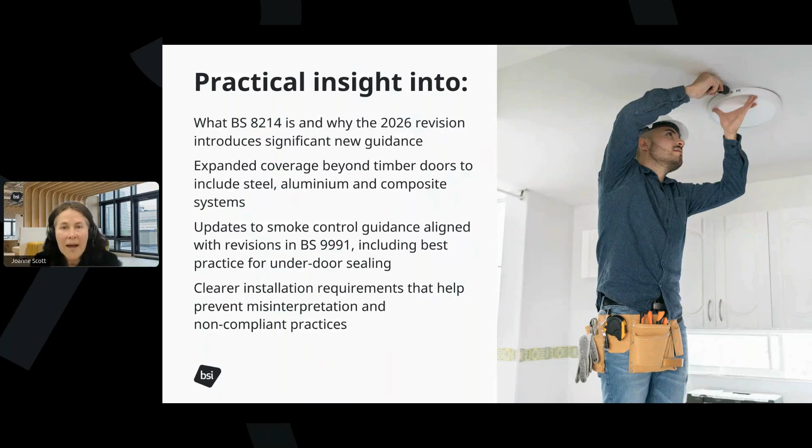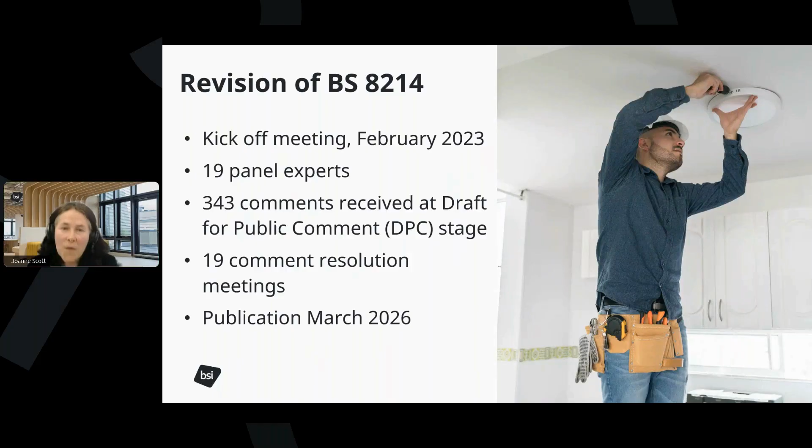So we had a kickoff meeting back in February of 2023. There were 19 experts on the panel and a mammoth 343 comments received at draft for public comment. That's the DPC stage. There were 19 comments resolution meetings. Finally, publication in March of 2026. Next slide, please.

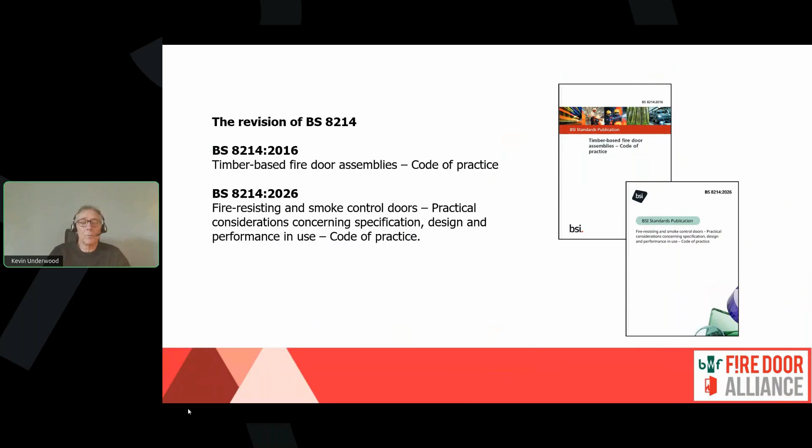We've touched on some of the themes of the changes that we've covered in this revision, and primarily, as you can tell in the titles that are on screen now, we've moved away from timber-based fire door assemblies into more widely encompassing fire-resisting and smoke control doors, and practical considerations around the specification, design, performance in use code of practice. It has principally incorporated more materials and more detail on what affects fire doors.

First of all, I'd like to thank the team that enabled us to run this project. First of all, the committee manager, Joanne Scott, who you've already met, but also two important people, our editorial project managers, Kemi Ho and Beverly Goodchild, without whose help and encouragement, I don't think we would have managed to get through this project. I'd also like to thank the team at BSI, because I know that there are a lot of people behind the scenes who were acting to help support this change, and certainly at the end when we were doing the final editing to get the standard ready for publication. And of course, I'd like to thank all the members of the drafting panel, which was B538111. Next slide, please.

So the committee structure within BSI: at the head of the structure is the technical committee B538, which I chair, and that covers all aspects of doors, windows, shutters, hardware, and curtain walling. Below that, there is the subcommittee B5381, which specifically covers windows and doors.

And then as a panel associated with B5381, we had B538111, which was the specific drafting panel for this revision of BS 8214. This is a temporary panel, so it will be dissolved once this work is completed.

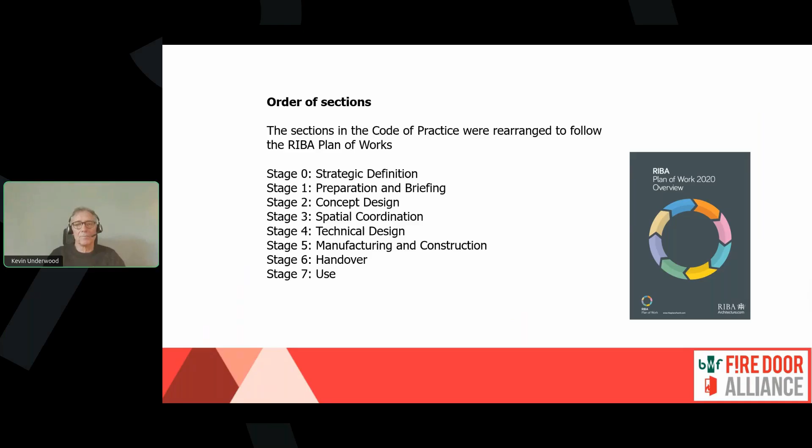So we reviewed the order of the sections, and as a guide, we then followed the RIBA plan of works so that we had all the design work and specification done first, then the product manufacturing, installation, handover, etc. Prior to following this principle, the sections of 8214 were not in the logical order as the project would be run on site. Next slide, please.

Competence. I think this is going to be talked about by other presenters as well, but the code of practice calls upon individuals and organizations who undertake a function in relation to fire doors to be competent, and they should have the necessary skills, knowledge, experience, and behaviors to fulfill the function. Further information on how someone is seen to be competent for their function can be found on the BSI Built Environment Competence Hub, which looks at the work that the Industry Competence Steering Group is doing with their sector-led groups on various aspects of construction. Next slide, please.

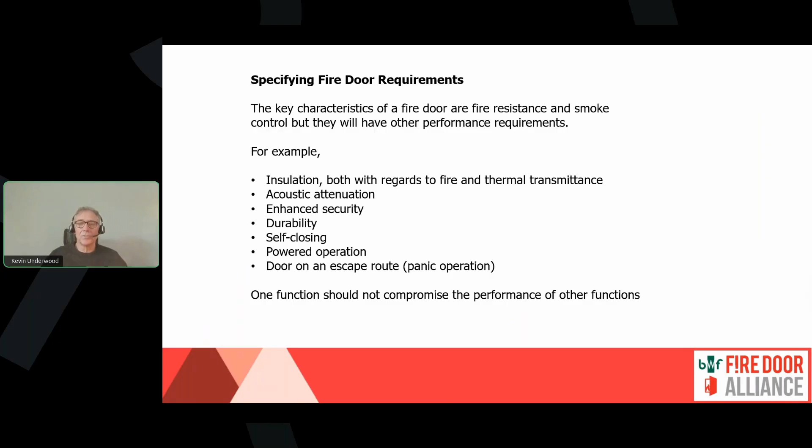Specifying fire door requirements. The key characteristics of fire doors are fire resistance and smoke control, but they will have other performance requirements. For example, I won't go through all of these: enhanced security, durability, self-closing. The key aspect of this change is that one particular function should not compromise the performance of all the other functions. Next slide, please.

Supporting evidence. Again, I think we're going to go into this in more detail, but supporting evidence can include test reports, DIAPs, direct application reports, EXAPs, extended application reports, field application reports, and technical assessments. If technical assessments are undertaken, they should be done in accordance with the PFPF guide, but also note that there is a project underway to draft a new code of practice for technical assessments, BS 8623. Next slide, please.

Smoke control. The recommended class for smoke control is Sa from BS EN 13501 Part 2. That's a European classification. We would also consider classifications using the national standard for smoke control. But the principle is that we want to note the leakage of smoke at the threshold. And we have removed the prescriptive 3mm gap below the door leaf because we didn't believe that gave a true representation of smoke control. Next slide, please.

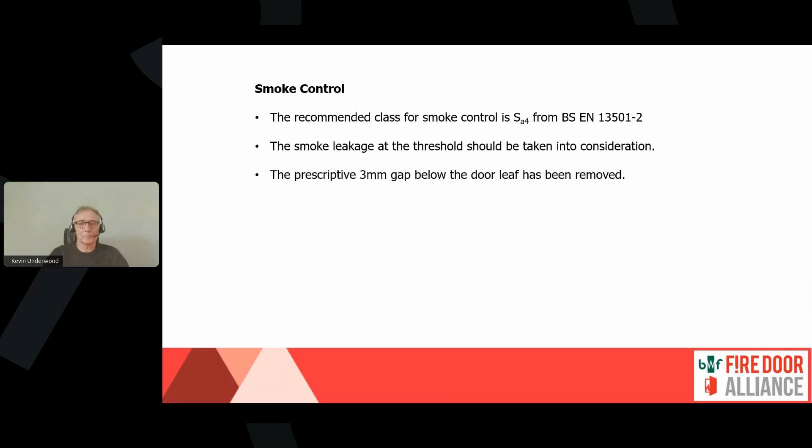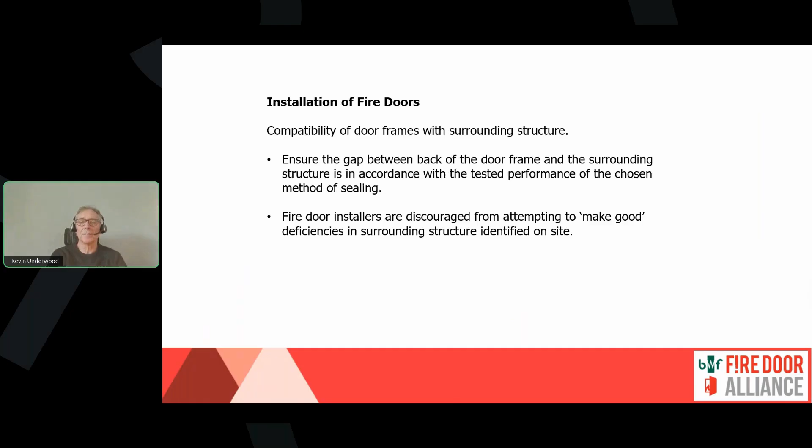Installation of fire doors. First of all, the door frames have to be compatible with the surrounding structure. We need to ensure that the gaps around the door frames to be installed are within the scope of the materials that are being used for the installation. And fire door installers are discouraged from attempting to make good deficiencies in the surrounding structure. Next slide, please.

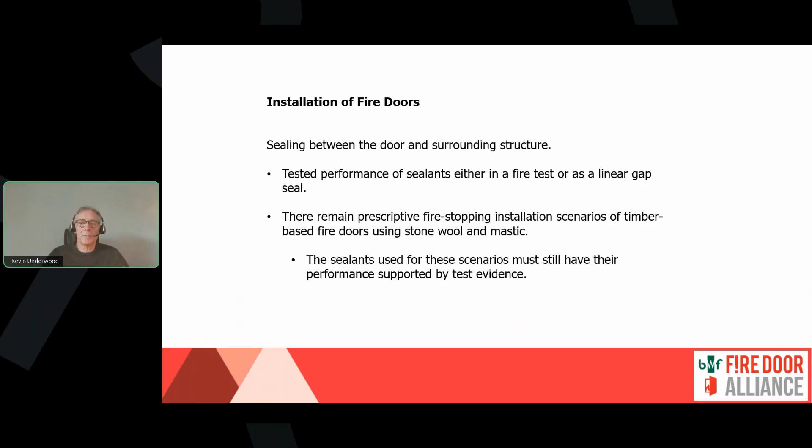Continuing with installation: sealing between the door and the surrounding structure. Tested performance of sealants, either in a fire test or a linear gap seal test. There remain prescriptive fire stopping installation scenarios for timber-based fire doors using stone wool and mastic, but in those scenarios, the sealants used should have had their performance supported by test evidence. And next slide. I think that's it. Yes, thank you.

Okay, so start with classification differences. I'm dealing with them in the order that Annex B brings them up. So in Annex B, section B12, it gives a description of the national system under the BS 476 regime. And if I just run through some of the key points related to that national system, we'll start with the column there with testing.

So the BS 476 series was originally developed back in 1932. It was a single standard back then, covering both resistance and reaction to fire. And then over time, it's gradually been split into specific parts, dealing with things like non-load bearing elements, in which fire resisting doors are tested, BS 476 Part 22. And we also have a specific test method for smoke control of doors as well. And I'll talk a little bit about the determination process shortly, but we have some specific British standards that are used for evaluating the fire resistance performance of doors.

Now, when it comes to the national system, when it comes to extending the scope beyond what has been tested using supporting test evidence, we use a process called assessment. And effectively, that's the application of expert judgment by experts in that field with experience of testing those construction products. And it gives a considered opinion based on suitable and sufficient evidence as to the scope of application, the different designs that could be supported by that test evidence.

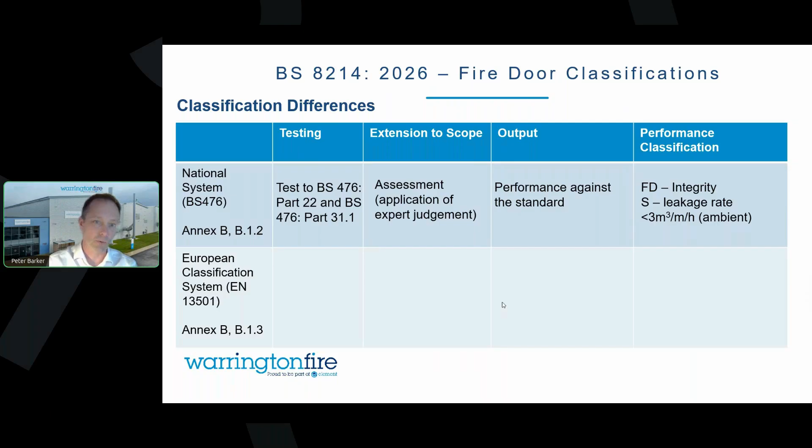Now, under the European classification system, in Annex B, B13, it picks up as a specific section there, and then you can start seeing some of the differences. Now, the European classification system was developed more recently than the 476 series in response to the single market requirements of the CPD at the time, the Construction Products Directive, but now the Construction Products Regulation, with a need to find common technical language, remove technical barriers to trade, and have a recognised single method for evaluating construction products and a way of communicating that performance by way of a classification system.

So that's where we now have the EN test standards, 1634-1 and 1634-3. Part 1 being for fire, Part 3 being for smoke. A different way of extending the scope of application using a more rule-based system to keep with that common technical language, known as direct application and extended application. And then the output, although it's still a performance, it's a classified performance, and these performance characteristics are classified using another series of standards, which is the EN 13501 series.

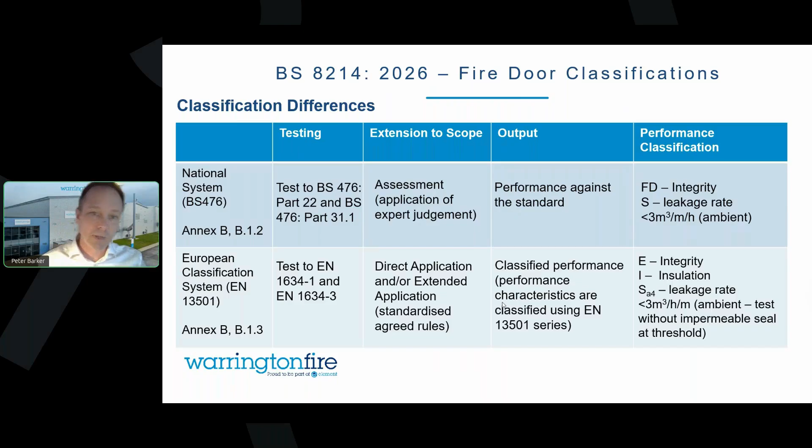And based on that evidence, you can then get performance classifications like I've listed in the box there, where E stands for integrity, I for insulation, Sa is this indication of leakage rate with or without an impermeable seal at the thresholds, some sort of seal, drop seal or fin or blade maintaining contact with the floor. And that classification system is recognised across Europe. That was its purpose, and it is then assigned to the door. And that's the shift towards the classification system using these ways of denoting the performances for those particular products. So they're the differences explained in the sections.

As you work your way through the Annex B, we move on to Annex B2. There's a section specifically on the determination process. So it talks about, first of all, testing and what goes into testing a door. And it talks about things being tested to benchmark standards. I've mentioned both the British standard version and the EN version for testing doors. And effectively, these benchmark standards are conditions that can be repeated to evaluate the performance of the product in standardized test conditions.

That's how we evaluate the door within a supporting construction, exposed to those test conditions, which are given in the test standard, along with the time temperature curve, the instrumentation, the modes of failure, what to record, what goes into a test report. And then on completion of that test, that information is collated into a test report, and that test report is a statement of fact. It tells you what was tested, conditions under which it was tested, the method against which it was tested, and the results from that test.

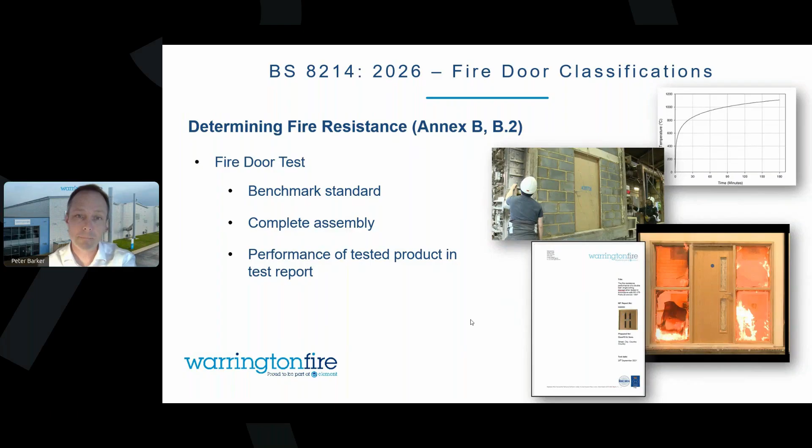We take that report, and based on that evidence, we're looking to widen the scope, either by interpolating the results, so what scope is covered by the results, or extrapolating to see if there's extension to scope that can be offered from that test evidence. Now, in the national approach, we use a guiding document. Kevin mentioned the PFPF guide. There's further work taking place within BSI to develop a code of practice called BS 8623 for the process of assessment outside of European classification. And inside EXAP, we use a series of standards called EXAP standards, which for doors is in the EN 15269 series. And it's that information that can then be used for a European classification.

And just to give you a flavour of what goes into these assessments: whereas the test report's a statement of fact, an assessment or an EXAP gives you that scope, covering some of the things that I put on the report there, the dimensions that are permitted, configurations, hardware options, seals, glazing, lipping, sizing, door frames, installation, decorative finishes.

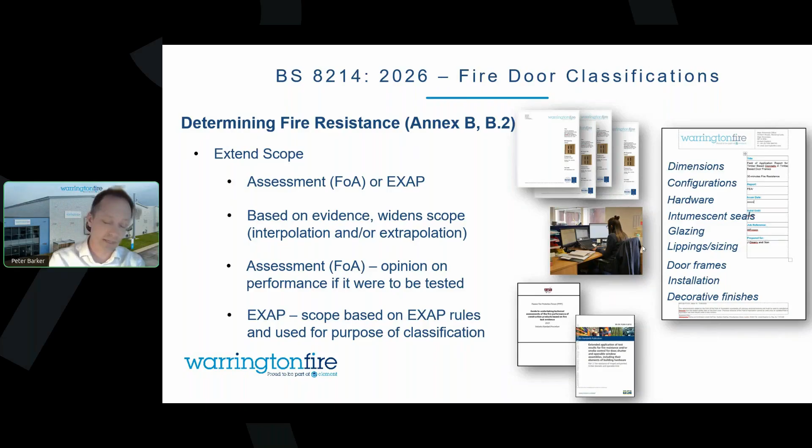And this assessment is often the document that will sit behind and support the third-party certification that we have within the third-party certification schemes that are used within this country, as well as regulated CPR stuff when it comes to CE marking as well, but only EXAPs and classification reports in that case. So that's a determination process.

So a flavour on the testing process, the differences between the European and British BS 476 system. What about understanding the evidence requirements? This was an important part of updating. If you look on the screen there, we've got an example of how supporting evidence is referred to throughout

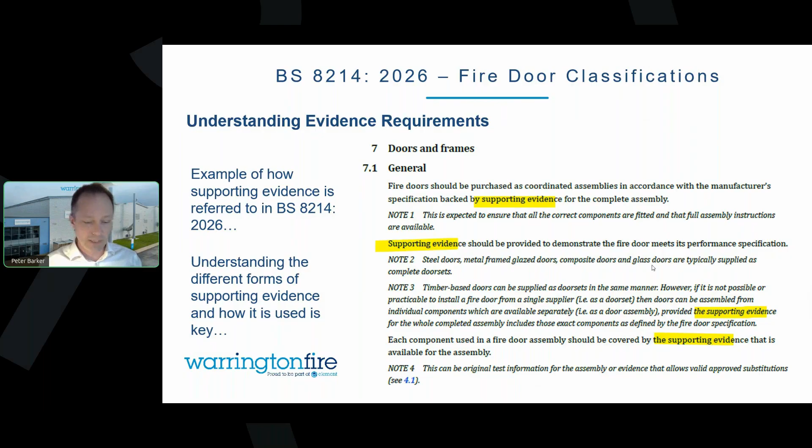BS 8214. For example, fire doors should be purchased as coordinated assemblies in accordance with the manufacturer's specification, backed by supporting evidence. You can see again, supporting evidence should be provided to demonstrate the fire door, and so on. So it's used a lot throughout the whole document, this collective term of supporting evidence. So understanding the different forms that it takes is very important, because although fire testing, as I've explained, is a building block of generating that base evidence, it tells you just on what was tested.

So the test report won't always be the thing that you need to understand whether or not the thing in front of you is supported. But it's an important part. So we have fire test reports. You may also have technical assessments. They could be a specific design assessment, an alteration to a tested product, or they could be a field of application, like I've described, these wider assessments that are used to give a field of application based on a series of test reports. Other pieces of evidence could be a European classification or an EXAP report.

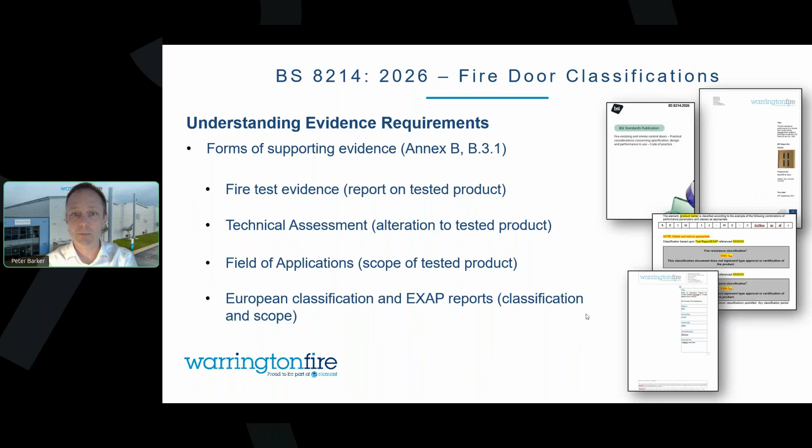There are also other documents that would be considered supporting evidence, such as technical documents and relevant installation instructions for CE mark or UKCA mark product, of which doors, somewhat confusingly at the moment, some fall within regulation, so therefore would be CE marked, and others don't, like internal doorsets. So you could expect to see this. You would also expect to see it on hardware items as well.

There could be other information and data. It mentioned that we have specialized functions. Fire doors do all sorts of other functions as well. So there may be some information there on acoustic or durability to give you some information on those specific functions to be supported by evidence.

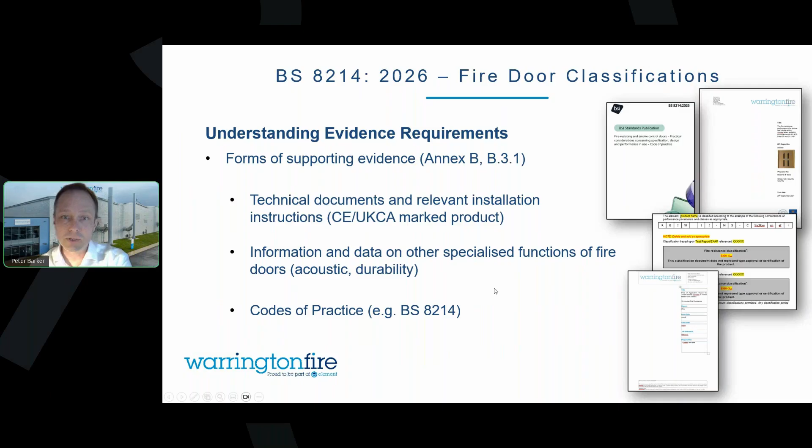But also a code of practice could even be considered a supporting evidence document. For example, the prescriptive ways of installing doors using rock fiber and mastic. The code of practice could then be used to support that particular install, providing it's been considered as appropriate for the door that's being installed. So lots of different forms that it can take.

So, for example, test reports, understanding that they are statements of fact, that any judgment beyond that should be contained within a formal assessment. Understanding that assessments of performance are self-contained, and you have to be very careful and cautious against using assessments on assessments. You would need it to be re-evaluated, otherwise you could be drifting further and further away from the thing that was tested. Third-party certification, understanding that you can only use third-party certification within the rules specified within third-party certification. Just because it's been certified doesn't mean it will work with another certified product unless there's that link.

European classification and EXAP, understanding the differences as to what that means and what can be used in that process. Product technical documents, understanding the CE marking, UKCA marking, declarations of performance, and what can work within that arrangement and that system. If you get any information and data from data sheets from manufacturers, making sure that you can interrogate that with supporting evidence as required.

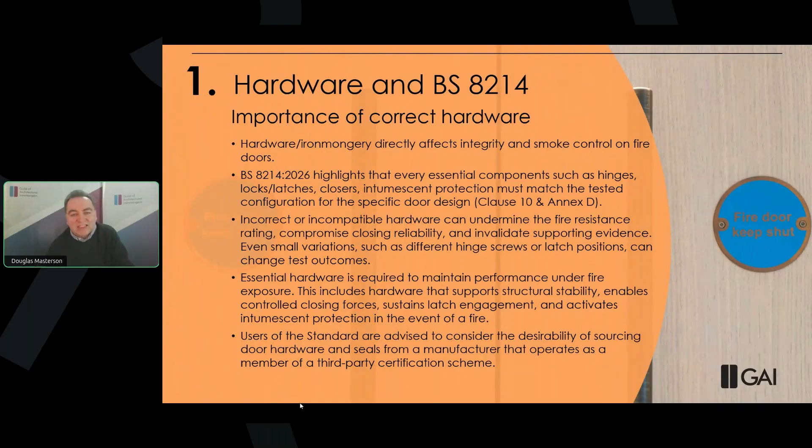So let's look at the importance of the correct door hardware on a fire door first. Now, hardware, otherwise known as architectural ironmongery, directly affects both integrity and smoke control on fire doors. And BS 8214 highlights that every essential component, and all the essential components are listed in Annex D. These include products such as hinges, locks and latches, door closers, intumescent protection, they all must match the tested configuration for the specific door design.

Now that's really important because incorrect or incompatible hardware can undermine the fire resistance rating, it can compromise closing reliability, and it can invalidate supporting evidence, and even small variations such as different hinge screws or different latch positions can change test outcomes. Because essential hardware is required to maintain performance under fire exposure. And this includes hardware that supports structural stability, enables controlled closing forces, sustains latch engagement, and also activates intumescent protection in the event of a fire.

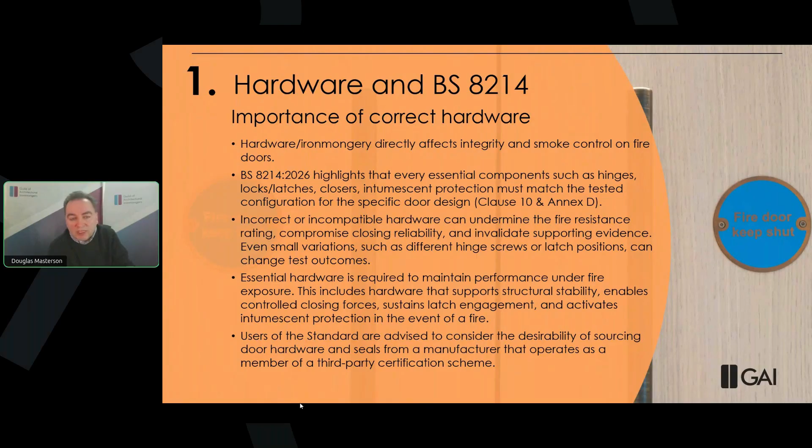Now, it does also signpost in the standard that users are advised to consider the desirability of sourcing door hardware and seals from a manufacturer that operates as a member of a third-party certification scheme. The thing about BS 8214 and hardware is that it looks at all different stages, as Kevin had mentioned earlier. It goes from specification right through to installation and even into maintenance, and hardware is mentioned in that context as well. So installation and fitting of door hardware is also of huge importance, specifically covered in section 10.2.

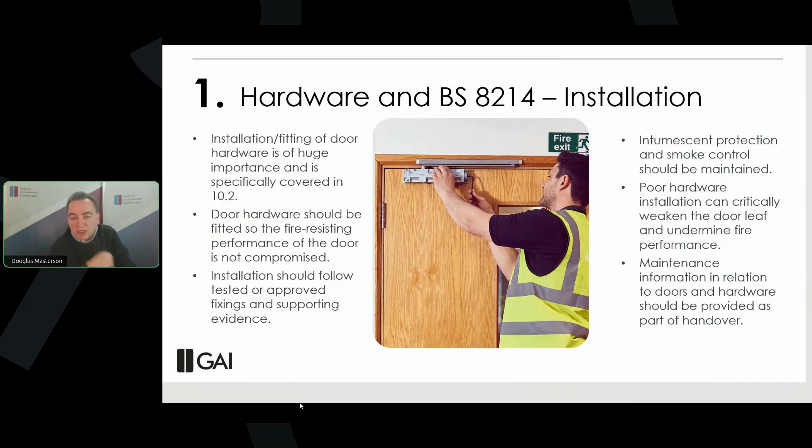And door hardware should be fitted so the fire resisting performance of the door is not compromised. So it means that installation should follow tested or approved fixings and supporting evidence. Also, intumescent protection and smoke control should be maintained because poor hardware installation can critically weaken the door leaf and therefore it can undermine fire performance. In addition to that, it states that maintenance information in relation to doors and hardware should be provided as part of the handover process within the operation and maintenance manuals.

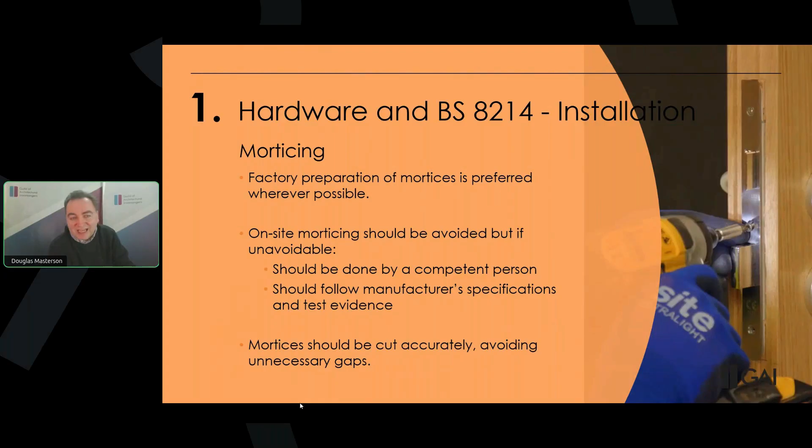Now, mortising, when we're coming into installation, is specifically referenced, and factory preparation of mortises is actually preferred wherever possible. It states that on-site mortising should be avoided, but if it's unavoidable, it should be done by a competent person and should follow manufacturer specifications and test evidence. It also states that mortises should be cut accurately, avoiding unnecessary gaps. But as it says, it's preferred that they are factory prepared on fire doors.

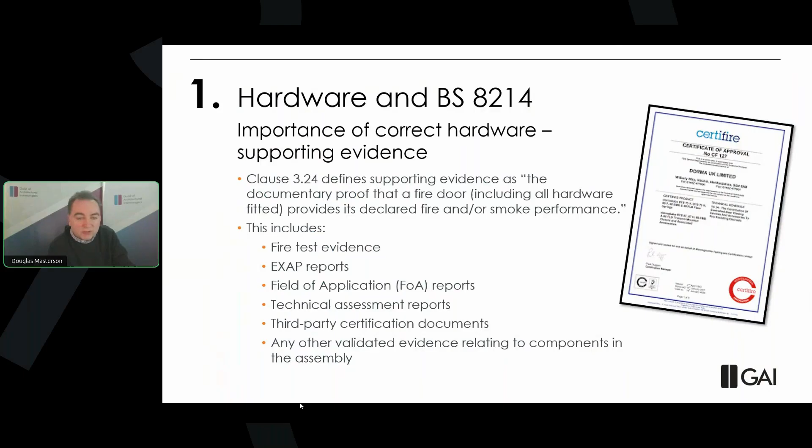I'm not going to go into too much detail on supporting evidence because that's already been covered by Peter. But just to state again, clause 3.24 defines supporting evidence as the documentary proof that a fire door, which includes all hardware fitted, provides its declared fire and/or smoke performance. So there's a list of some of the supporting evidence there, but I won't go into those again in detail because, as I say, Peter's already picked up on those earlier.

Why is the supporting evidence required? Well, it's because a fire door will only perform as tested when all the components, which includes the hardware, match what was used in either the original test or the technical assessment. And BS 8214 makes it clear that changing hardware without supporting evidence can invalidate the fire door's performance. And this principle is repeated throughout the standard in a number of clauses.

The fire and smoke seals are also mentioned in BS 8214, particularly as part of essential hardware. So intumescent seals that are used to seal between the frame and the supporting construction should be included in a fire-resistance test of a fire door in accordance with BS 476-22 or BS EN 1634-1 and should meet the required performance class for the installation. And again, Peter's referred to that earlier.

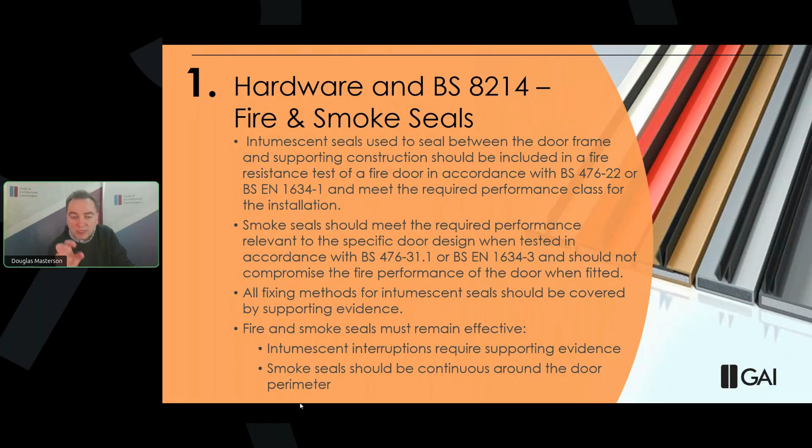It's the same with smoke seals. Required performance relevant to the door design, but in this case, it should be tested in accordance with BS 476-31.1 or BS EN 1634-3 and should not compromise the fire performance of the door when it's fitted. All fixing methods for intumescent seals should be covered by supporting evidence, and fire and smoke seals must remain effective. So intumescent interruptions should require supporting evidence, and smoke seals should be continuous around the door perimeter.

Now, air transfer grilles are mentioned in section 10. And the reason why these products, similar to items such as letter plates or door viewers, are because these are products where large apertures can and must be cut into the fire door itself. So this isn't just for a mortise, but this is for an aperture, and an air transfer grille provides a particularly large aperture. So in the same way we talked about before, air transfer grilles must have supporting evidence for use on the specific door construction. They must achieve the required fire resistance and, where applicable, smoke leakage performance.

Intumescent materials and components used in the fire test, including the likes of metal cover grilles, must be installed as tested, and only decorative grilles included in the supporting evidence are permitted. Now, it talks about the door application: fire containment only, fire resisting doors, for example, FD30, and if there's fire and cold smoke containment, must be suitable for fire and smoke doors for the likes of E30Sa, S200 as applicable.

Now, when it comes to installation, the installation must follow full manufacturer fitting instructions, must be carried out by competent persons only, and all grilles must be commissioned in accordance with the manufacturer's instruction. So note, the same way with letter plates, etc., positioning matters. Grille location can affect the fire performance, and it also states air transfer grilles to steel and composite fire doors should be factory fitted.

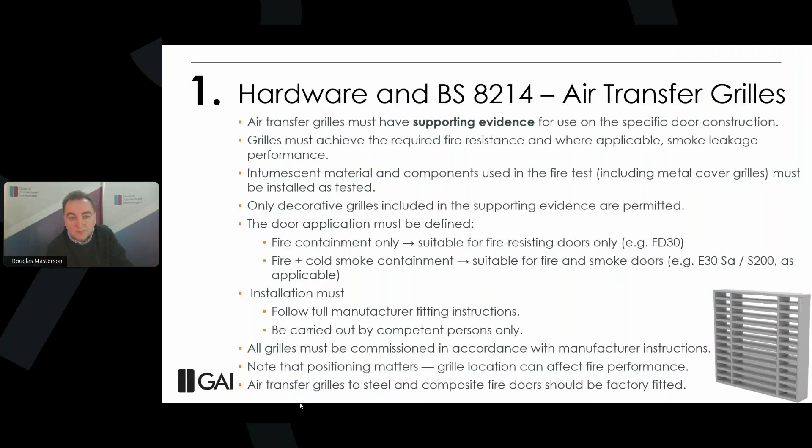Access control is something that there is a lot more emphasis on within 8214, and these access and security controls, products such as magnetic locks that form part of a fire door, should be planned now in advance with the fire door manufacturer, and it's that supplier who's responsible for ensuring early coordination. So the door's supporting fire test evidence should include the access control item itself, or list it as an approved component of the door assembly.

Now, installation methods such as drilling, fixings, cable routes, and you can have cable routes right through a fire door, particularly for a solenoid or motor lock, they must be confirmed as acceptable by the door manufacturer and should be carried out in accordance with the supporting evidence.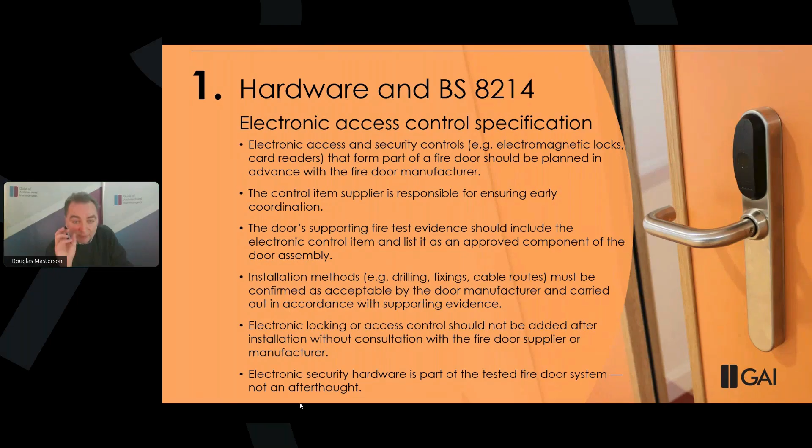So electronic locking or access control should not be added after installation without consultation with the fire door supplier or manufacturer. And that happens far too often. Very often access control is seen as an afterthought and then is applied once the door has been installed. Very often, could be 2 or 3 years down the line. It is part of a tested fire door system and should not be treated as an afterthought.

Now let's take a look at competence and the necessity for it when specifying door hardware for fire doors. It was talked about earlier with Dame Judith Hackitt and the Hackitt review post Grenfell. There was a warning within her review that said that competence across the system is patchy. She therefore highlighted widespread failures in skills, qualifications, and understanding across construction, fire safety, maintenance, regulatory rules. And there was an emphasis that industry must undergo a fundamental cultural shift to ensure that only properly trained, qualified, and accountable people work on safety critical aspects of buildings.

BS 8214 builds upon this, and it emphasizes that only competent people should specify fire door hardware. A competent person is defined in the standard as an individual, suitably trained and qualified by the appropriate skills, knowledge, practical experience, and provided with the necessary instructions to enable the required tasks to be performed correctly with regard to the appropriate behaviours for the carrying out of these tasks.

Those were the 4 elements of competence within BS 8214, also in the Building Safety Act. Skills, so these are defined as practical abilities through training or experience. Knowledge, theoretical understanding of procedures, regs, standards. Experience, that's exposure to relevant roles, enhancing judgment and decision making. And behaviours, those are observable actions reflecting professionalism and adaptability.

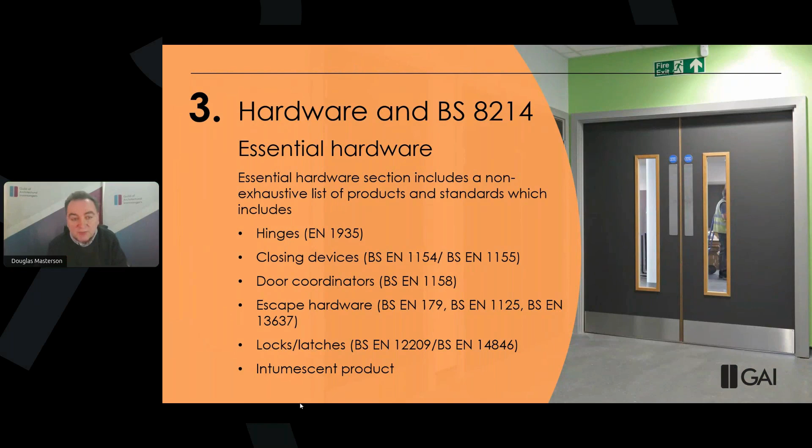And there's now expanded clarity on the difference between essential and non-essential hardware. So essential hardware is required for the tested fire resistance performance, whereas non-essential items may still affect the outcome, particularly if they're incorrectly fitted. The essential hardware section includes a non-exhaustive list of products and standards, which includes hinges, closing devices, both mechanical and electromechanical, door coordinator devices, escape hardware, again mechanical and electromechanical, locks and latches, and also intumescent products. All these items are listed within essential hardware.

If we move on to non-essential hardware, it's defined as items of hardware that are not normally considered necessary for fire performance, but which might be necessary for means of escape or the function of the door. This includes products such as lever handles, pull handles, kick plates, push plates, and accessories. And we now have an expanded list which includes other products such as mechatronic door furniture.

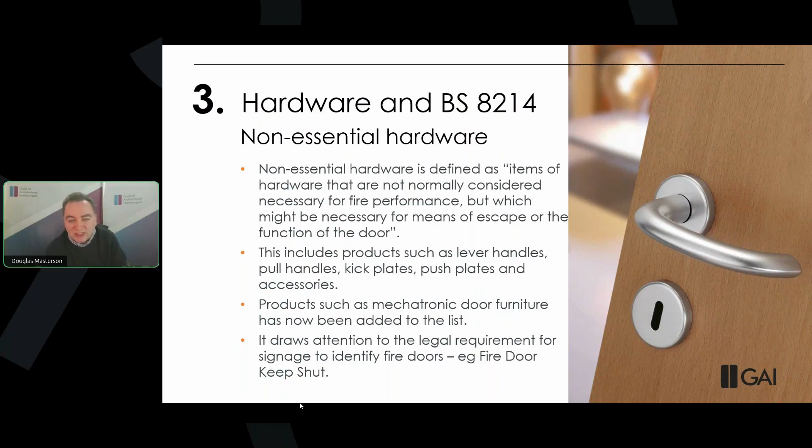The standard also draws attention to the legal requirement for signage to identify fire doors. So you will see, for example, in Approved Document B statutory guidance, a requirement for self-closing fire doors to have 'Fire door keep shut' signs on both sides of the leaf. So it does draw attention to that legal requirement, as well as BS 5499, which gives more information on signage on doors.

Where enhanced security is required, and that can include the likes of apartment entrance doors, you may have additional compliance because you may not just have fire, but also security. And this may include PAS 24 or LPS 1175 standards. These cover resistance to forced entry, and they require certain items of hardware such as cylinders, locks or reinforcement components to be tested as part of a complete system. And a number of other security-related standards are listed in this revision. That includes BS 3621 for thief-resistant locks, DHF TS 007 for cylinders, and Sold Secure standards from the MLA. So this is a new extra requirement that's been put into 8214.

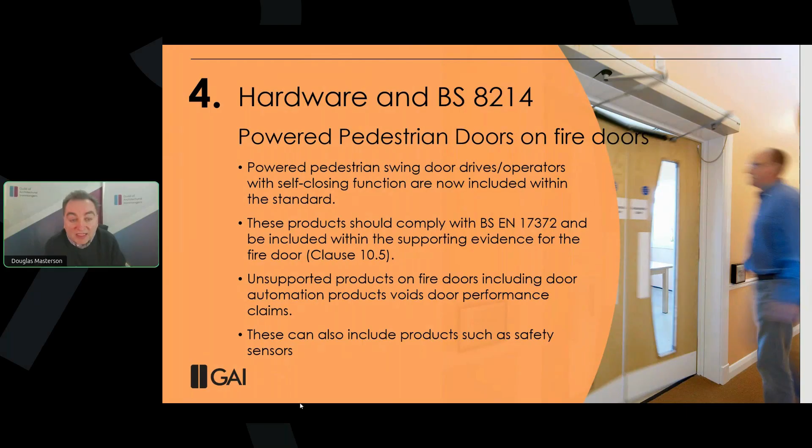Briefly as well, you'll find that powered pedestrian doors are now within BS 8214. These operators with a self-closing function are included within the standard, and they should comply with the BS EN 17372 standard and be included within the supporting evidence for the fire door. Unsupported products on fire doors, including door automation, void door performance claims, and many installations of powered pedestrian doors happen on existing doors. And that can include not just the item itself, but products such as safety sensors as well.

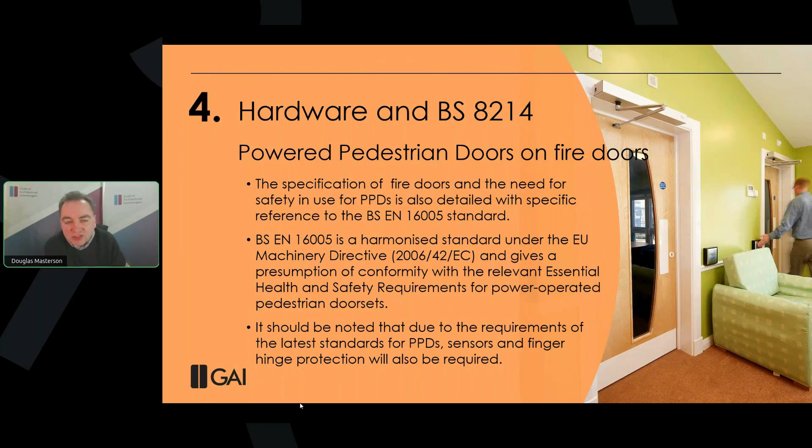It does also refer to the BS EN 16005 standard within 8214. That's a harmonized standard under the EU Machinery Directive, and it gives a presumption of conformity with the relevant essential health and safety requirements for these items. It should also be noted that due to the requirements of these latest standards, sensors and finger hinge protection are also required.

That's me coming towards the end of my section now, but for anybody who has a real passion or interest in architectural ironmongery or door hardware, further publicly available information is available on gai.org.uk/knowledge. There are specifier guides on the likes of intumescent, on the likes of air transfer grills and fire doors, in addition to end user guides and further guidance.

Also, the DHF and GAI Code of Practice for hardware for fire and escape doors, which is mentioned not just in BS 8214, but also in statutory guidance across the UK and Ireland, such as ADB, Technical Booklet E, etc. That's available on firecode.org.uk. Conscious there was a lot of information there on hardware, but obviously it is a critical and key component to a fire door, therefore of huge consequence.